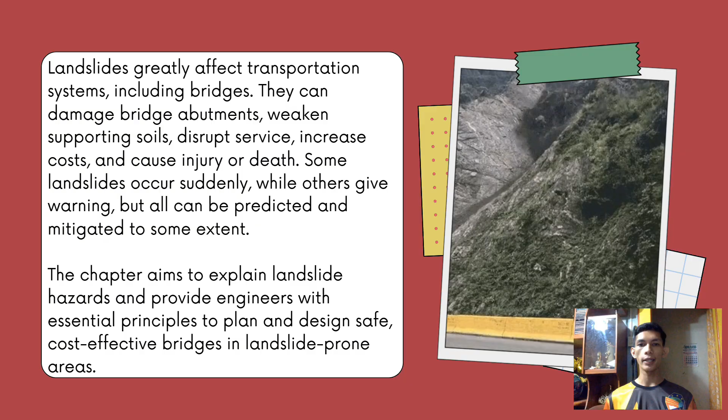So the chapter aims to explain landslide hazards and provide engineers with essential principles to plan and design safe, cost-effective bridges in landslide-prone areas. This lesson covers first, introduction; second, landslide hazard assessment and landslide risk management; third, landslide types and causal factors; fourth, slope stability analysis and selection of design soil parameters; fifth, landslide risk mitigation; and sixth, landslide monitoring and warning systems.

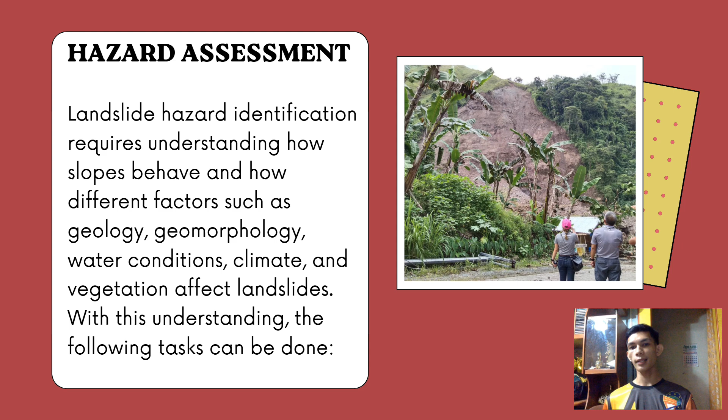I will be discussing the landslide hazard assessment. Landslide hazard identification requires understanding how slopes behave and how different factors such as geology, geomorphology, water conditions, climate, and vegetation affect landslides. So when we say geomorphology, it is the study of landforms. When we say geology, it is the study of rock and soil types. So with this understanding, the following tasks can be done. First, classify the types of potential landsliding.

The classification system proposed by Varnes in 1978 as modified by Cruden and Varnes in 1996 constitutes a suitable system. It should be recognized that a site may be affected by more than one type of landslide hazard. For example, deep-seated landslides occur at the site, whereas rockfall and debris flows will initiate from above the site. So this means identifying what kind of landslides might occur in the area, for example, rockfalls, debris flows, deep-seated slides, and so on.

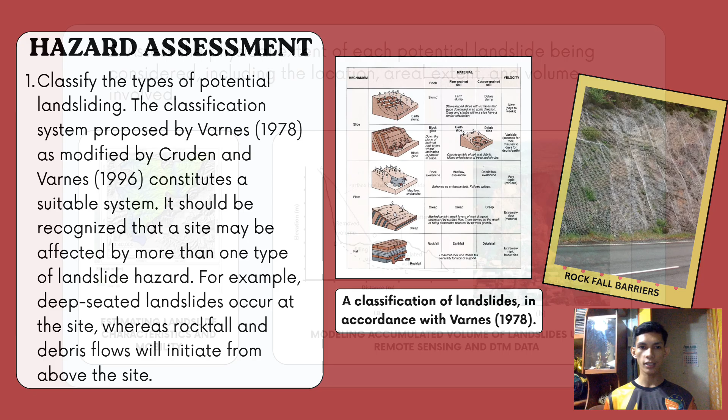So the Varnes classification system is commonly used because it helps engineers describe landslides in a standardized and organized way. It is used to properly name, describe, and understand landslides, which helps experts predict hazards and design the right solutions.

So the second one is assess the physical extent of each potential landslide being considered, including the location, areal extent, and volume involved. So this involves determining where the landslide might happen and how big it could be, including estimating the location, area affected, and the volume of material that may move. The purpose of determining where a landslide might happen, or how big it could be, is to reduce risk and protect lives, property, and the environment.

So as you see in the figure, the first one is estimating landslide characteristics and mobility. The second one is modeling accumulated volume of landslides using remote sensing and DTM data. So we can use remote sensing to estimate the location, areal extent, and volume involved, and also the DTM data. When we say remote sensing, it means collecting information about the Earth's surface without touching it, just like satellites, drones, and aerial photography.

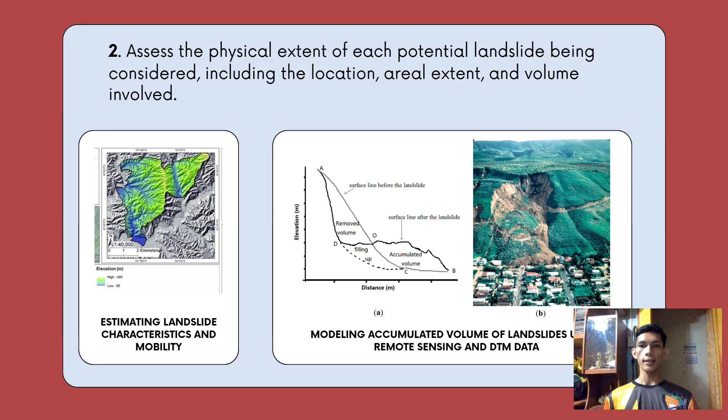So the third one is assess the likely causal factor or factors, the physical characteristics of the materials involved, and the slide mechanics. This means that we can identify the likely triggers of the landslide, for example, rainfall, earthquakes, human activity, and so on, and also understand the physical properties of the soil or rock involved. The last but not the least is estimate travel distance and speed. So we need to estimate the landslide travel distance and speed.

So we need to also, or in short, we need to predict how far the landslide may travel and how fast it may move, so as to assess the potential impact on people, infrastructure, and the environment.

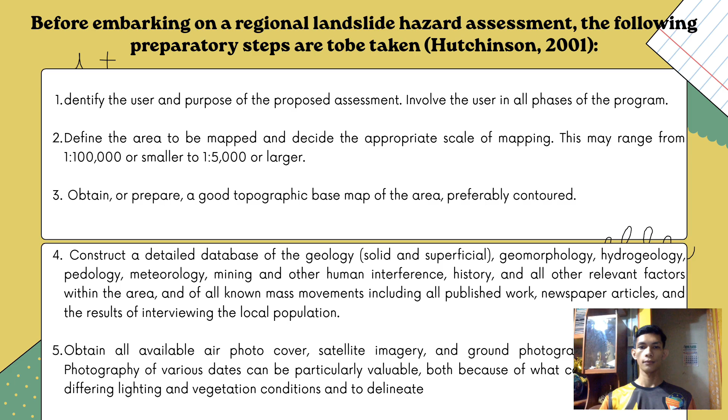So, landslide risk management. The risk management process has two main parts: risk assessment and risk treatment. Risk assessment answers important questions such as what might happen, how likely is it, what damage may result, and how important is it. Meanwhile, risk treatment focuses on what actions can be done to reduce the risk. In landslide and slope engineering, this process has long been practiced through the engineering judgment of experienced engineers and geologists, even before it was formally recognized as risk management.

So, risk assessment answers several important questions, and we can identify the level of danger in a certain area by understanding this. On the other hand, risk treatment focuses on the actions we can take to reduce or control the risk. These include measures and strategies that help lessen the impact of potential hazards.

So there is a clear difference between hazard, risk, and probability. A hazard is a dangerous condition that can cause harm, such as a slope that may fail. So when we say hazard, mao na kanang katalagman. It includes the landslide's location, size or volume, type, speed, and chance of occurrence. Risk refers to the possible damage or injury to people, property, and the environment based on both likelihood and severity of the event.

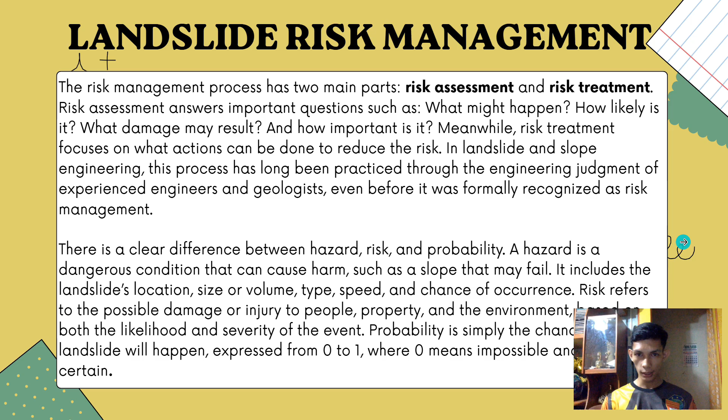As we see in the next slide is the process of landslide risk management. As we see in the figure, there is a pattern. So we can see the scope definition, hazard identification, consequence analysis, frequency analysis, risk calculation, risk evaluation, treatment options, treatment plan, implement plan, monitoring and review, risk treatment, risk management, risk assessment, risk analysis, reconsider, and last but not least, the feedback. So this is the process of landslide risk management.

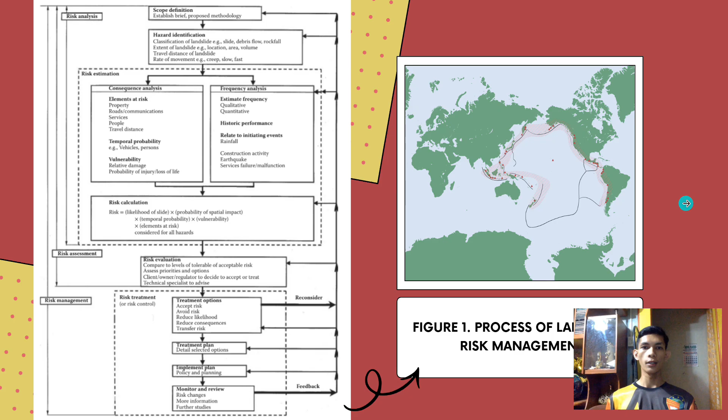So, landslide inventory maps. The International Union of Geological Sciences, or IUGS, defines landslide hazard as the probability that a potentially damaging landslide may occur within a specified time and area. Meanwhile, landslide risk assessment refers to the expected degree of loss, including life loss, injuries, property damage, and economic disruption. To properly assess landslide hazard and risk, experts rely on knowledge from geoscience, geomorphology, meteorology, hydrogeology, and geotechnical engineering.

So according to the International Union of Geological Sciences, or IUGS, a landslide hazard is defined as the probability that potentially damaging landslides may occur within a specified time and area. Meanwhile, landslide risk assessment refers to the expected degree of loss. This includes possible loss of lives, injuries, property damage, and even economic disruption.

So landslide inventory maps are used to show the distribution of landslide hazards and identify areas where landslides may occur. They include the locality or location, date, and historical record of past landslides. Ideally, these maps provide details on probability, type, magnitude, velocity, runout distance, and retrogression limits. The type of information and map detail depends on the level of development in the area being studied, as ignoring landslide potential can increase risk.

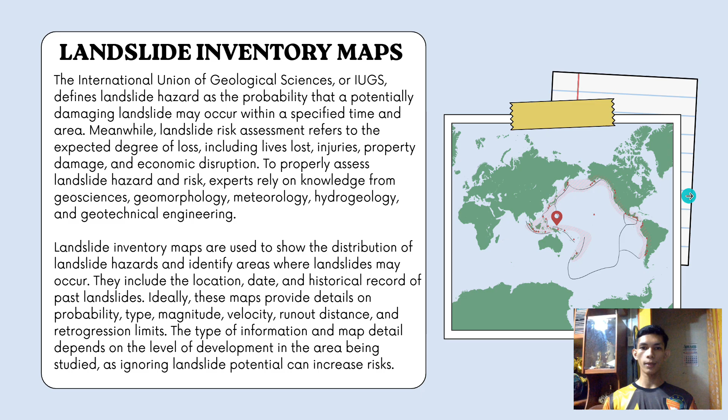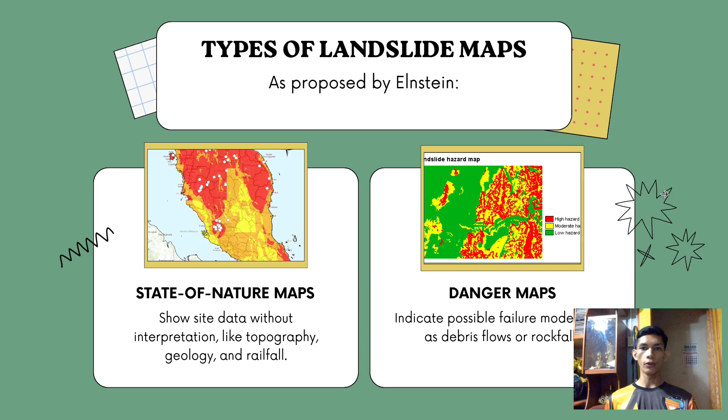So there are types of landslide maps as proposed by Einstein. The first is state of nature maps, which show site data without interpretation, like topography, geology, and rainfall. The second is danger maps. They indicate possible failure modes such as debris flows or rock falls. The third is hazard maps, which show the probability of failure, often expressed as high, medium, or low. The fourth, management maps, summarize decisions for landslide management.

Maps can also be created at different scales depending on the purpose. The first is national scale, or 1:1,000,000. It is a general hazard overview for policymakers. The second is the regional scale, 1:100,000 to 1:500,000. When we say 1:100,000, it is 1 centimeter to 1 kilometer on the ground, and also 1 centimeter to 5 kilometers on the ground. Its purpose is to evaluate constraints for large projects and regional planning.

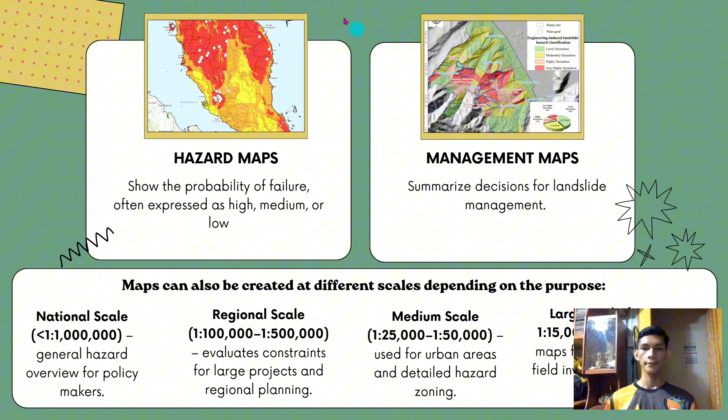Landslide types and causal factors. Landslide classification. The UNESCO Working Party's definition of a landslide is the movement of a mass of rock, earth or debris down a slope, and recognizes that the phenomena described as a landslide are not limited either to the land or to sliding. The word has much more extensive meaning than its component parts suggest.

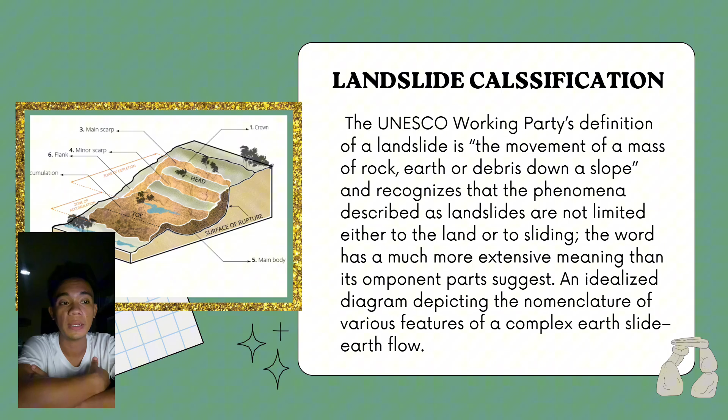An idealized diagram depicting the nomenclature of various features of complex earth flow. So, muna siya ang different types sa pag-classify sa landslide. So, we have crown, main scarp, minor scarp, flank, accumulation, foot, and the main body, and also the surface of rupture.

As there is a wide spectrum of landslide types, the potential or already occurred landslide should be classified as clearly as feasible. The criteria used by the UNESCO Working Parties on the World Landslide Inventory in classification of landslides emphasize the type of movement and the type of material. The division of materials are rocks, debris, and earth.

Rock is characterized as an intact, hard, or firm mass in its natural place prior to the initial movement, whereas soil is referred to as an aggregate of unconsolidated solid particles, either transported or derived in place via weathering processes. The latter is further divided into earth, in which 80% or more of the particles are smaller than 2 mm in size, and debris, whereby 20% to 80% of the solid particles are larger than 2 mm.

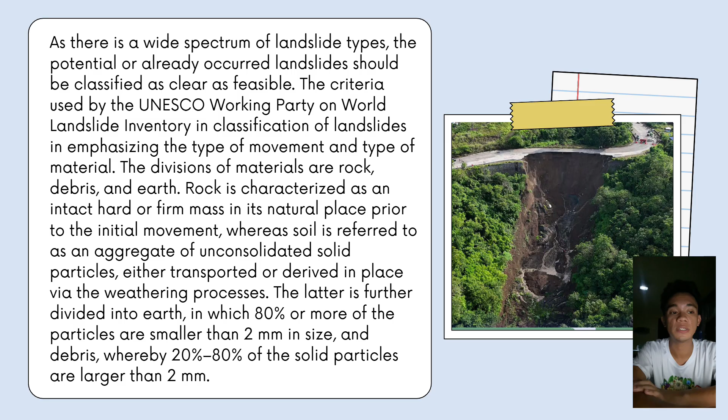So next, movements are divided into 6 different types. So we have falls, flows, slides, spreads, topples, and complex movement. In reality, there is a continuum of mass movements from falls through slides to flows. In many instances, it is difficult to determine whether masses of materials have fallen or slid, and similarly, there are a number of instances in which materials have both slid and flowed. Very large falls can result in various types of flow involving fluidization with either water or air.

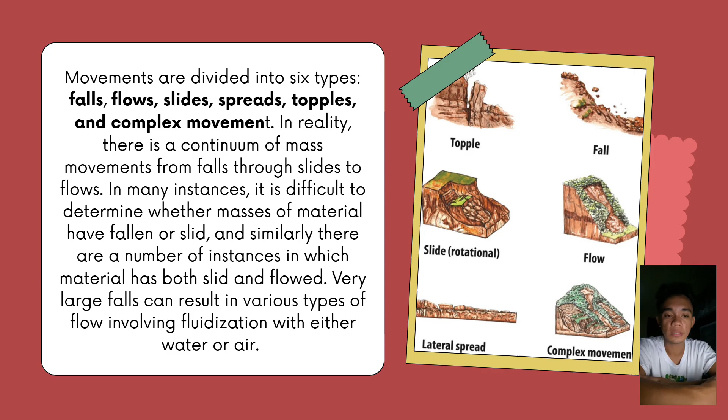The Department of Environment recognizes the existence of complex landslides in which ground displacement is achieved by more than one type of mass movement, and emphasizes that this should not be confused with a landslide complex, which is an area of instability within which many different types of mass movement occur. The qualitative expression of the former is small, medium, or large, whereas the latter is expressed qualitatively as slow, moderate, or fast, as in the downslope velocity of a debris flow.

A landslide is known to be active when it's presently moving. So landslide daw is active lang daw siya pag presently moving na siya.

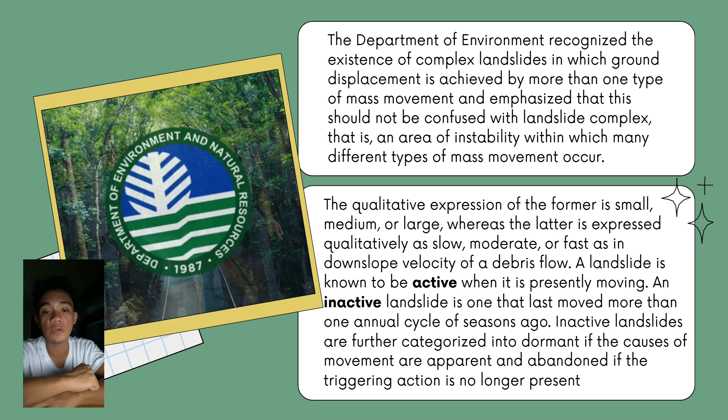Landslide causal factor: the process of a slope movement involves a series of events from cause to effect. Recognizing the conditions that led to slope instability and the triggers of movement is essential for assessing landslide hazard. An accurate diagnosis is crucial for understanding landslide mechanisms and proposing effective treatment and measurement.

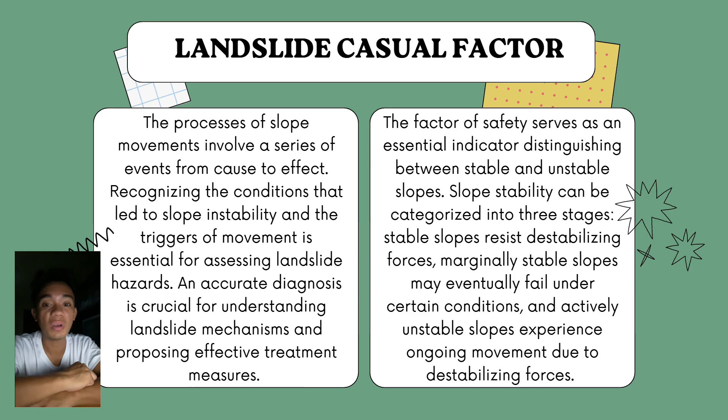The 3 stability stages represent a continuum from stability to instability, where the probability of failure is low at the stable stage, increases through the marginally stable range, and reaches certainty at the actively unstable stage.

This framework aids in understanding the causal factors of landslides, classifying them into 2 functional groups. Number 1 is the preparatory causal factor, which makes the slope susceptible to movement without actually initiating it, tending to place the slope into a marginally stable state. Number 2 is the triggering causal factor, which initiates movement; this factor shifts the slope from marginally stable to actively unstable. That was already explained earlier.

Slope stability and selection of design soil parameters: there are 2 primary methods for analyzing slope stability. The first method is the forward approach, which necessitates data on shear strength properties and pore pressure conditions. Shear strength is obtained through various field and laboratory methods, while pore pressure analysis requires advanced techniques to accurately measure groundwater and soil suction responses during rainfall events without dampening peak conditions. The approach assumes conservative, worst-case parameter values to derive a factor of safety.

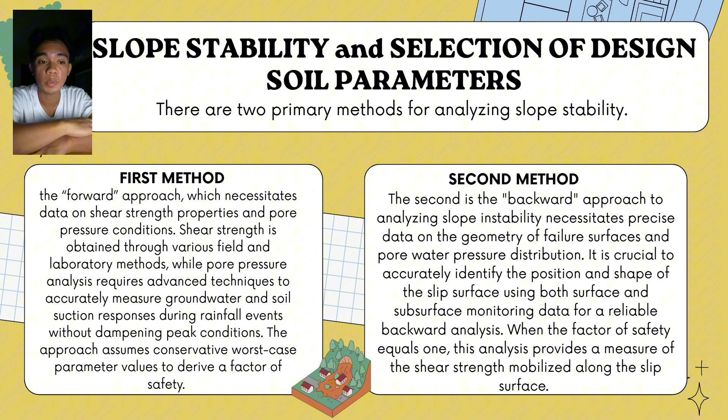When the factor of safety equals 1, this analysis provides a measure of the shear strength mobilized along the slip surface. Shear strength parameters for slope stability analysis: the limit equilibrium methods, forming a framework of slope stability analysis, generally accept the Mohr-Coulomb failure criterion, which can be expressed in terms of effective or total stresses.

The Mohr-Coulomb shear strength in terms of effective stress is as follows: shear strength equals C plus normal stress times tan phi, where TF and normal stress are the shear stress and effective normal stress respectively on the failure surface, and C and phi are the shear strength parameters: cohesion intercept and internal friction angle respectively, in terms of effective stresses.

The second formula is: TF equals CU plus normal stress times tan phi U. This is the shear strength for slope stability analysis in terms of total stresses, where normal stress represents the total normal stress on a failure surface, and CU and phi U are the shear strength parameters: cohesion intercept and internal friction angle respectively.

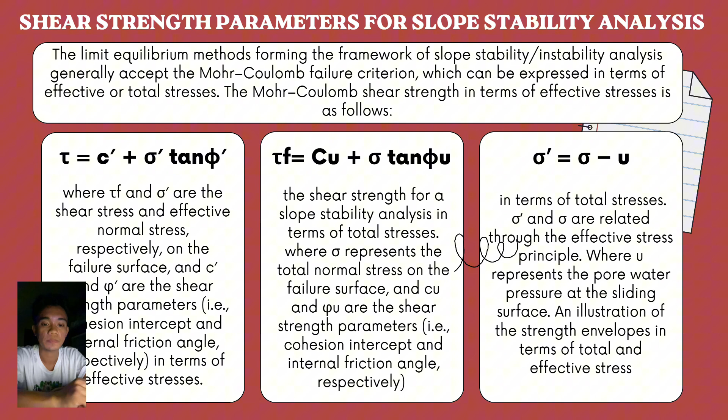The third formula: effective normal stress equals normal stress minus U. In terms of total stresses, normal stress and effective normal stress are related through the effective stress principle, where U represents the pore water pressure at the sliding surface. This gives an illustration of strength envelopes in terms of total and effective stress. Backward analysis of slope stability.

Backward analysis is a valuable method for determining design shear strength parameters in slope stabilization. It treats slope failure as a full-scale shear test, providing insight into the strength activated at the slip surface.

The shear strength parameters derived from the analysis, which align closely to actual slope performance, can inform a limit equilibrium analysis or design of the remediation strategy compared to a laboratory or in situ test. Back analysis parameters offer enhanced reliability for designing necessary remedial measures.

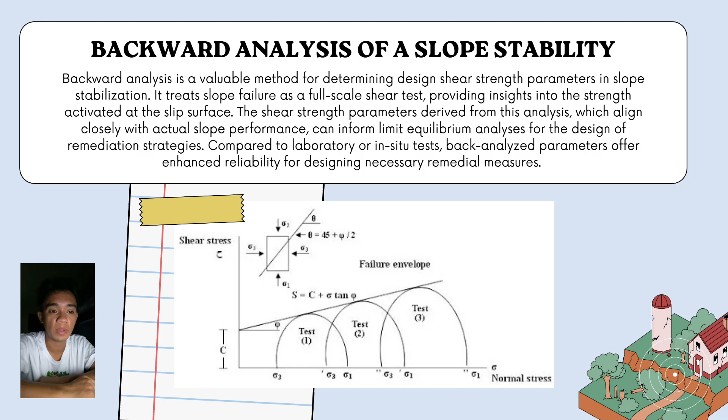Procedures to determine the magnitude of both shear strength parameters, or the relationship between them, considering the position of the actual slip surface within the slope.

The two unknowns, that is the shear strength parameters C and phi, can be simultaneously determined from the following two requirements. Number one is Fs equals to 1 for the given failure surface, meaning the back calculated strength parameters have to satisfy the C, tan phi limit equilibrium relationship, as shown in the picture.

Number two is Fs equals minimum, for the given failure surface and the slope under consideration, meaning the factor of safety for slip surfaces slightly inside and slightly outside of the actual slip surface should be greater than 1, as shown in the picture.

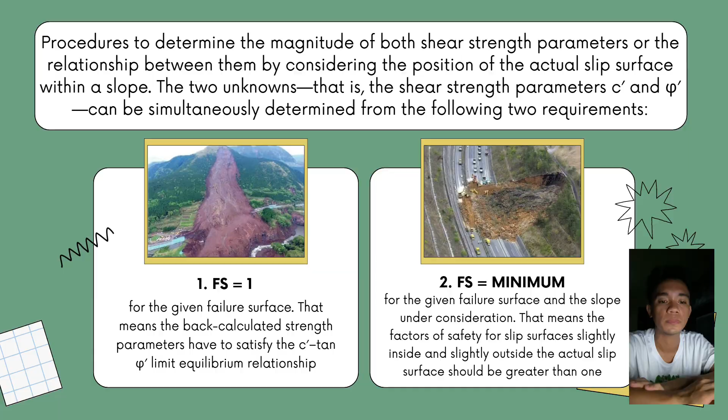Seismic slope stability analysis: instability can occur in a slope where the shear strength remains essentially constant during shaking. During an earthquake, the ground acceleration generates inertial forces. Failure or displacement occurs when earthquake acceleration exceeds the slope's yield acceleration.

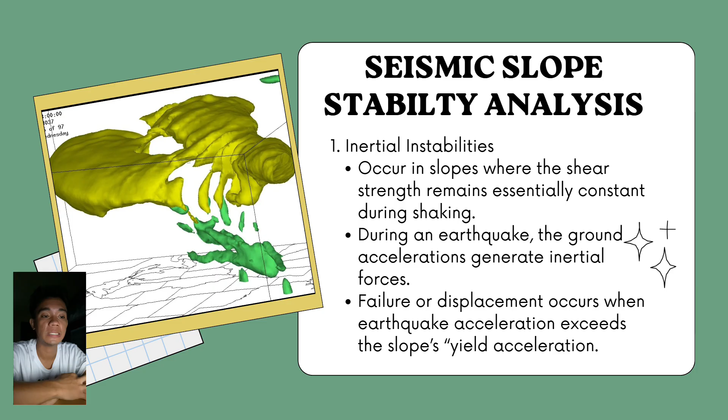Landslide risk treatment option. Risk treatment is the final stage of the risk management process and provides a methodology for controlling the risk. At the end of the evaluation procedure, it is up to the client or policymakers to decide whether to accept the risk or not, or whether more detailed study is required.

As shown in the figure, there is a planning phase where you must study the project first, then preliminary design of general project options. Second is the design phase, then third is the construction phase: install monitoring systems, then construct, then after that the maintenance phase. Is the project performing satisfactorily? If yes, continual periodic monitoring. If no, revise design.

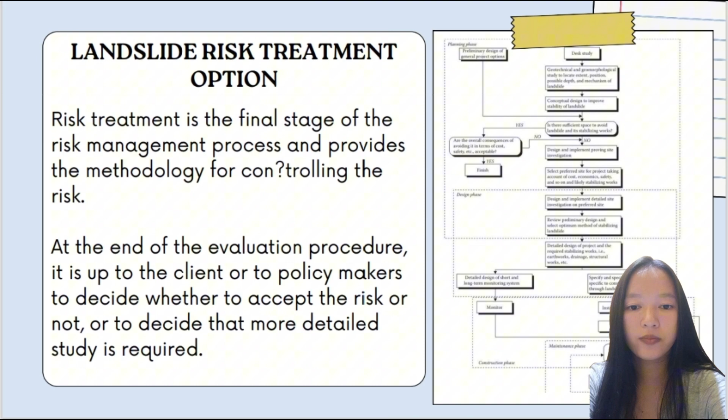Before diving into construction, we must first decide on a strategic approach to the risk. The Bridge Engineering Handbook defines 7 risk treatment options. First, accept the risk—consequence and likelihood are deemed acceptable.

This means accepting the risk while continuously monitoring the slope to ensure conditions do not worsen. This is typically reserved for low-risk scenarios. Second is risk avoidance, the ideal solution, meaning changing the bridge alignment or location entirely to bypass the unstable slope, minimizing interaction between the asset and the hazard.

Third is reduce likelihood. This requires stabilization measures to control the initiating circumstances, such as reprofiling the surface geometry or installing groundwater drainage, anchors, stabilizing structures, or protective structures.

Fourth is consequence reduction. This requires provision of defensive stabilization measures, amelioration of the behavior of the hazard, or relocation of the development to a more favorable location to achieve an acceptable or tolerable risk—minimizing the impact if failure occurs, like installing monitoring or warning systems.

Fifth is monitoring and warning systems. In some situations, monitoring such as regular site visits or surveys, and establishment of warning measures, may be used to manage the risk on an interim or permanent basis. Monitoring and warning systems may be regarded as another means of consequence reduction.

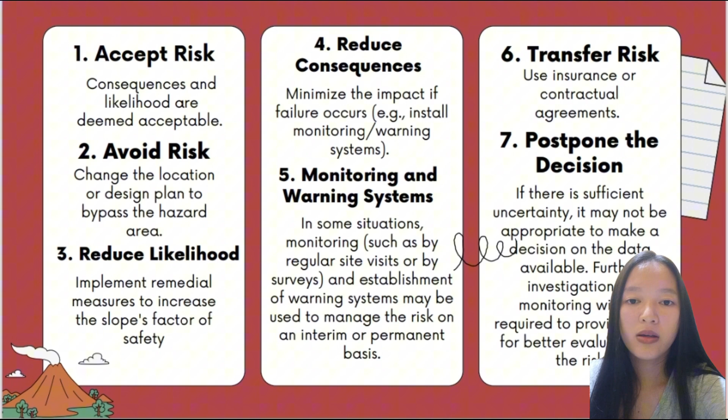According to the handbook, there are three primary categories of remedial measures. The first is drainage measures. These are universally regarded as the most effective and often the most cost efficient. They focus on removing water from the slope, which directly increases the soil's effective strength.

Since groundwater is the single greatest trigger for landslides, drainage measures therefore directly target the factor that reduces the shear strength of soil. There are different types of drainage measures. Surface drainage is the simplest measure, involving the construction of open ditches and concrete-lined channels to intercept surface runoff before it infiltrates the ground. Effective surface drainage is mandatory for any landslide-prone area, not just for bridges but for any landslide-prone zone.

Subsurface drainage or interceptor drains are for shallower groundwater. Subsurface trench drains are deep trenches backfilled with free-draining gravel and a perforated pipe designed to intercept and convey water away from the sliding mass. So it's basically a network of trench drains effective in shallow slides.

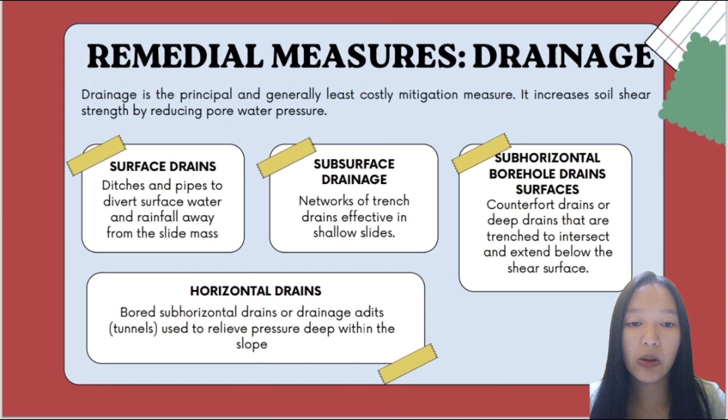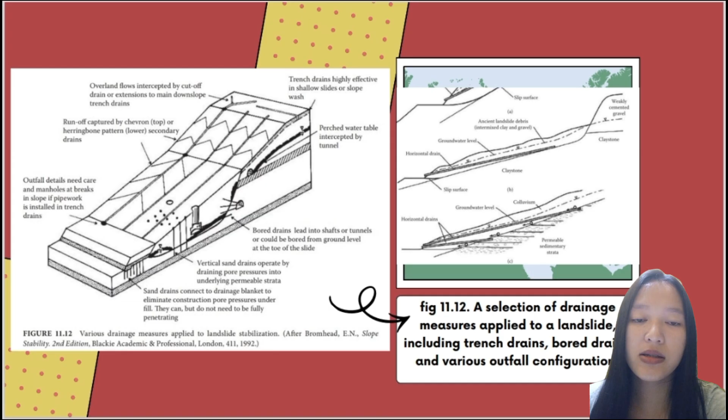In the next slide, figure 11-12 shows various drainage measures applied to landslide stabilization, including bored drains and surface drains. The next figure is an example of horizontal drains.

Another remedial measure is structural measures. These are reinforcement techniques that increase the shear strength along the potential slip surface, typically involving external elements like piles or retaining walls. These are implemented when drainage alone is insufficient or when stability must be guaranteed for a critical asset like a bridge.

Different types include retaining structures. This includes heavy gravity walls or cantilevered walls built at the toe of the slope to resist the sliding force. These are passive measures that rely on their weight and internal strength.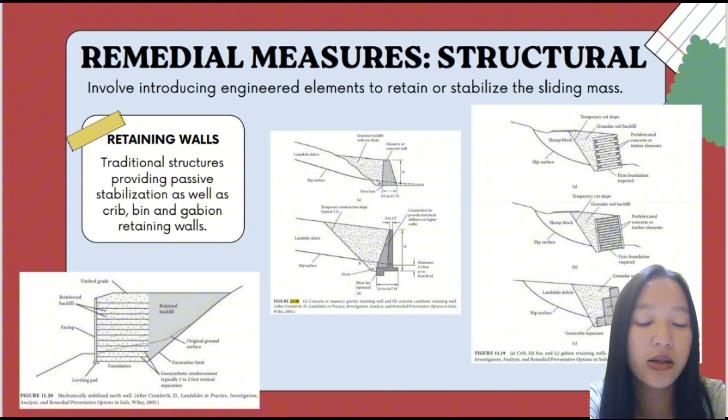Another is stabilizing piles or piers. A highly effective measure for deep-seated slides is driving or drilling large diameter stabilization piles or reinforced concrete piers deep into the ground, ensuring they penetrate the slip plane and socket into stable bedrock. These piles resist the sliding mass through shear and bending.

Soil anchors and anchored walls: for unstable slopes, we can use ground anchors, post-tensioned high-strength steel tendons, to actively pull the unstable soil mass back into stable rock beneath, effectively pre-stressing the slope to increase stability. There are example pictures shown.

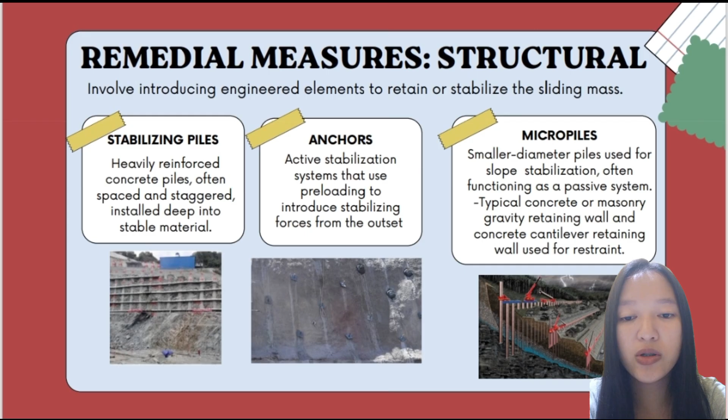Another is micropiles, which are smaller diameter piles used for slope stabilization. A different type is soil nailing, installing and grouting steel bars or nails into a slope face to reinforce the soil. This avoids the need to expose or alter the slope, reducing the failure risk.

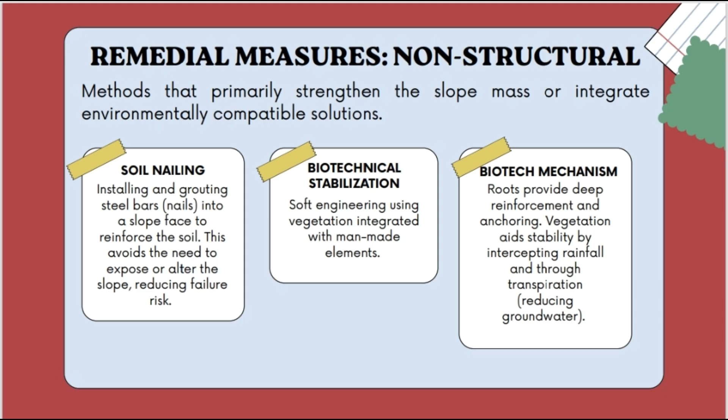Another is biotechnical stabilization, which is soft engineering using vegetation integrated with man-made elements. One mechanism is biotech: roots provide deep reinforcement and anchoring, and vegetation aids stability by intercepting rainfall and through transpiration, reducing groundwater.

Effectiveness and acceptability has five levels. The choice of measure is a trade-off among technical, financial, and societal factors. Design must be flexible, or a design-as-you-go approach, due to unknown geological features.

Number one, engineering feasibility: the measure must be physically effective and compatible with the natural system, so it must work. Second is economic feasibility: the cost must be balanced against the benefits, such as avoided damage or deferred maintenance.

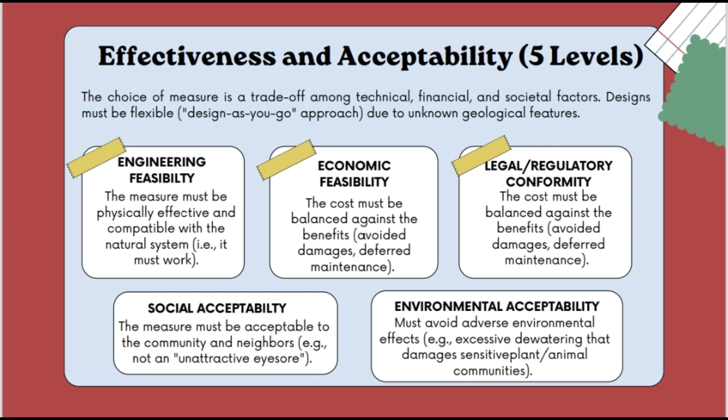Third, legal or regulatory conformity: it must comply with all local codes and regulations and avoid creating liability for adjacent properties. Fourth, social acceptability: the measure must be acceptable to the community and neighbors. Fifth, environmental acceptability: it must avoid adverse environmental effects like excessive dewatering that damages sensitive plants and animal communities.

Now I will continue the discussion by focusing on landslide monitoring and warning systems and the stages that landslides go through. This is very important because, as we all know, we could not stop nature. So what we could do is prepare people and predict the danger through monitoring and warning systems. Through that, the damage will be reduced. That is why landslide monitoring and warning systems are very essential for reducing landslide risk.

So we will start first with monitoring. What is landslide monitoring? Landslide monitoring means regularly observing, and not just observing but also taking into consideration and measuring the condition of a slope, so you would understand if it is becoming unstable.

What is the main purpose of monitoring? The main purpose is to detect early signs of danger, which could protect communities near the slope. Monitoring gives us the chance to prevent disaster before it happens.

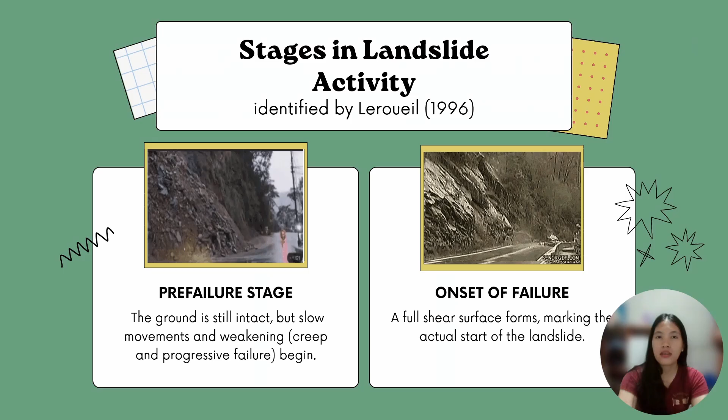Now, according to Leroueil, 1996, naay mga stages in landslide activity. So, una, naay pre-failure stage. Diri sa pre-failure stage, the ground is weakening, slow movements known as creep begin, and then warning signs like cracks or bulging may appear.

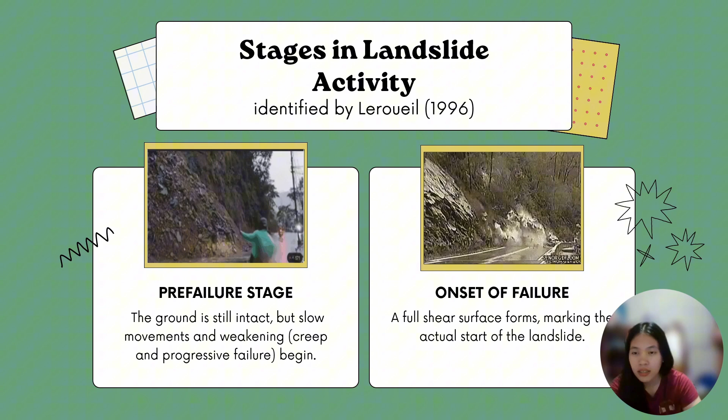And then the next stage is the onset of failure. In the onset of failure, a shear surface fully forms and marks the beginning of the actual landslide. For example, after continuous rain, the crack deepens, and the soil nagsugod na mag-break apart. So, diri ang onset of failure.

Next is the post-failure stage. So, diri nga stage kay the soil or the rock mass has failed and continues moving until it eventually stops. Kibali, the soil or the rock mass is already sliding down.

And then the last stage, according to Leroueil, is the reactivation stage. Older landslides can move again. So kato siya nga lugar, say for example, 5 years ago, gilandslide to siya. And then ni-active na po siya, nibalik na po siya, nagpakita na po siya signs of reactivation nga mag-landslide ang katong lugar na ni-landslide 5 years ago. So that is the stages of landslides identified by Leroueil 1996.

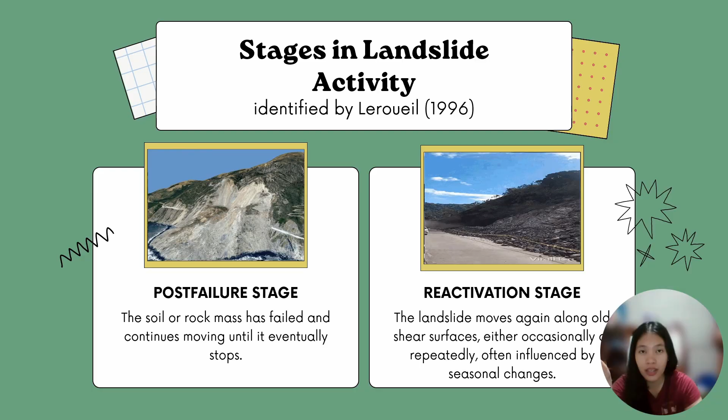So many landslide prevention methods are expensive. Kay dili man na siya dali buhaton, right? That is why ang uban, they may prefer cheaper, less disruptive options like monitoring and early warning systems. However, para mag-work siya effectively, according to Hutchinson 2001, dapat ma-met kanang mga conditions. So the first condition is the monitoring system must measure the right factors, be properly located, and function reliably. Meaning, dapat accurate and reliable.

When we say right factors, i-measure nila yung mga right factors like rainfall, soil movement, or ground water pressure. And dapat nakalocate siya sa correct position. Kung i-position nimo siya sa lugar nga wala gyud landslide at all, hindi po siya pulos.

So second is experts must continuously evaluate the monitoring data. Ang mga trained professional dapat ang mag-interpret sa data because the monitoring devices are useless if nobody checks them. So next is the decision must be made quickly once danger levels are reached. When dangers are reached, authorities must act immediately. No delay.

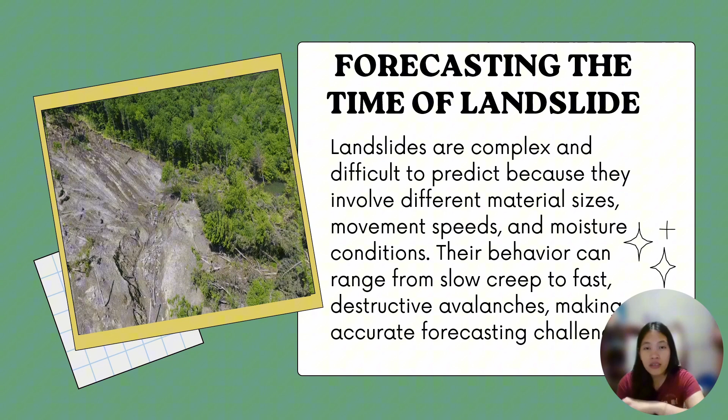Now, forecasting the time of landslide. Landslides are complex and difficult to predict because they involve different material sizes, movement speeds, and moisture conditions. Their behavior can range from slow creep to fast, destructive avalanches, making accurate forecasting challenging. Landslide prediction is categorized into long-term, intermediate term, and short-term. Predicting the exact time remains challenging, just like earthquake, due to unclear physical behavior, variable ground conditions, and unpredictable triggers like heavy rainfall.

However, tracking displacement movements is one of the most useful methods. There have been successful predictions like the Chuquicamata mine case. It shows that even estimates with some margin of error can support decision making.

In conclusion, landslide hazards assessment is the key first step in managing landslide risk. Once hazards are identified, we can estimate which structures are at risk, the damage they may face, and compare the cost of mitigation with potential losses. High-risk areas must be identified, ranked, and addressed quickly. Mitigation measures may include relocating structures, stabilizing slopes, proper land use planning, and maintenance and emergency preparedness. Effective landslide management requires cooperation between engineers and geologists, moving the practice towards a more scientific and systematic approach.